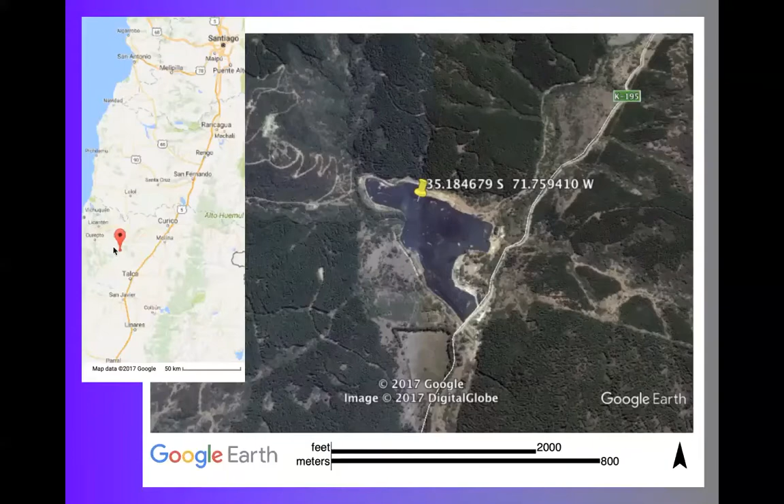The inset map on the left shows the location where this tailings dam failure was. Santiago's up on the upper right, and our location is about 2.5 hours south of Santiago along Route 5 near the town of Talca. This tailings dam was at a defunct gold mine. It had stopped operations, I believe, in '83.

What we could piece together was this was the construction of the tailings dam in four phases. There was an initial phase of ponding with coarse material for the dam, and then there was a downstream dam that was placed and then expanded, and then this was the state it was left in when the gold mine closed down. You can see that there might be issues because this tailings dam is floating on some of the ponded material, and upstream this one's also on the ponded material. As we know, that's a no-no when you're constructing tailings dams.

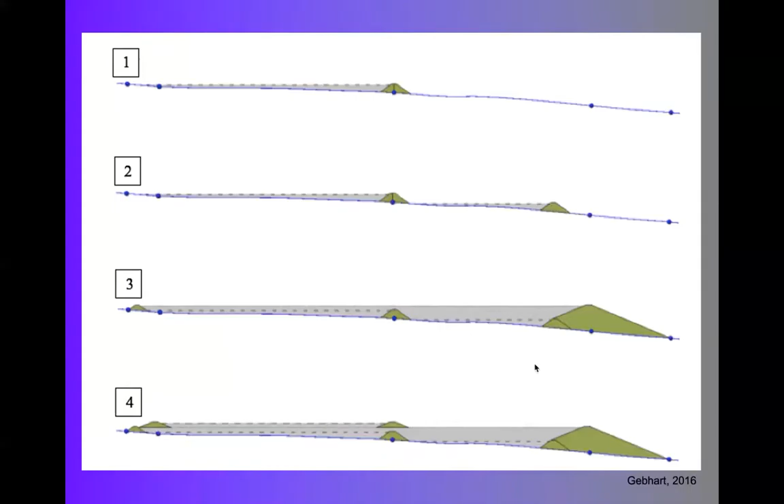So along comes the magnitude 8.8 earthquake. This was, I believe, the 5th largest earthquake in recorded history until the Tohoku event happened, and then it got bumped down to 6th. But this was a major event, and the ground shaking was distributed over a vast area.

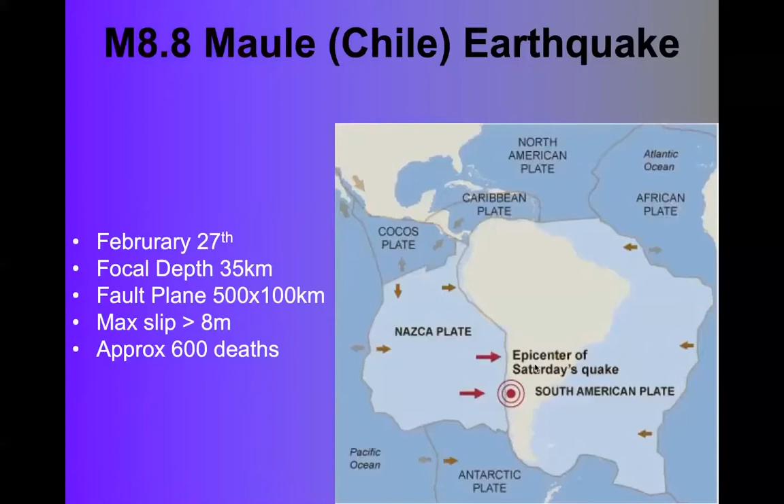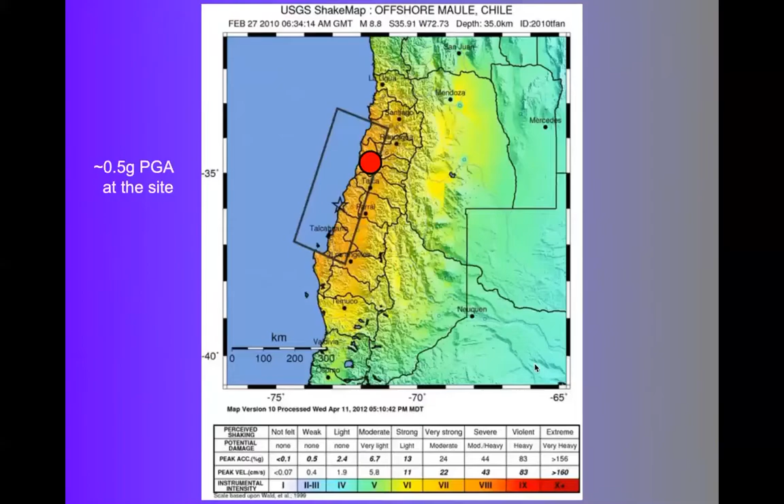So once the Santiago airport was opened, I was part of the first team that was in there. I was on team, I think I was actually before Team A. I was there with Christian Ledezma and Montalva also was there. We started to get the investigations going.

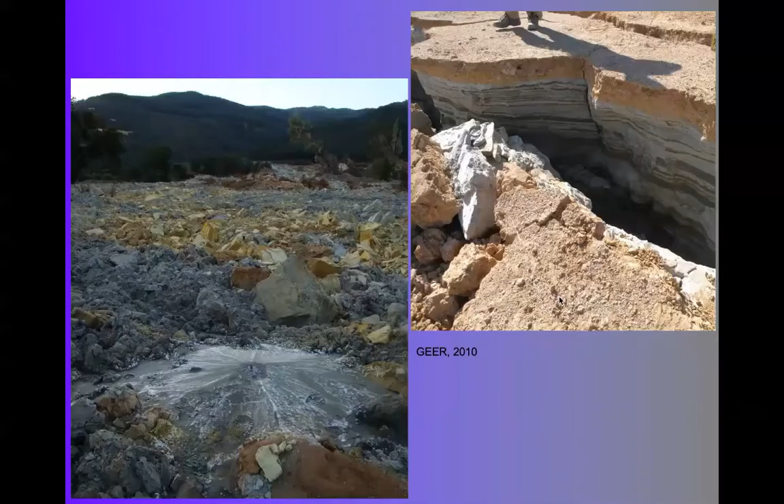I've given this talk a couple times now, and you can imagine the interested parties are mining parties. I've given it in Santiago to academics, mining engineers, and mining company executives. I've also given it in Butte, Montana, where mining is essentially ceased, but there are massive tailings dams looming above the city. So you can imagine when I give it to those audiences, I have their rapt attention.

So I'm going to digress a little bit into the physics. Recently I've been looking at tying debris flows and flow failures together. I live in California and work on liquefaction, and I also work on debris flows and flow failures. So I was interested in the overlap of the physics, and there are some commonalities. We can have liquefaction or debris flows triggered by a number of different mechanisms.

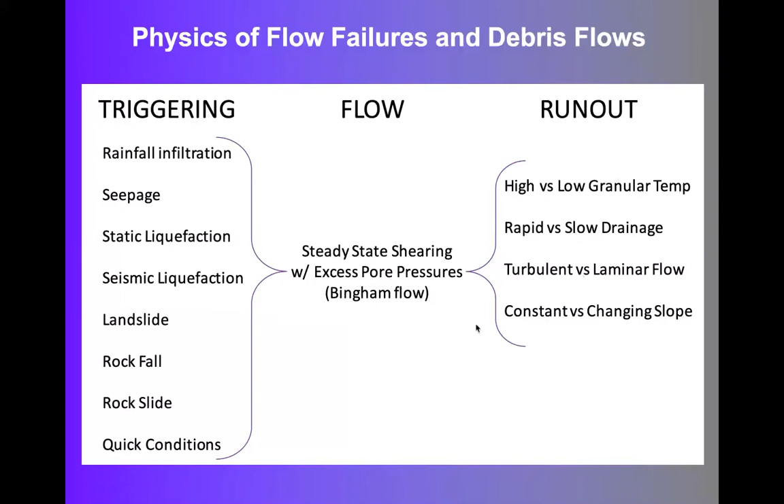With our tailings dam material, generally we're dealing with a contractive material that's going to be above the critical state line, where when it's triggered, or we start stressing it, particularly in a seismic manner, we hit the instability line and then we start to get flow.

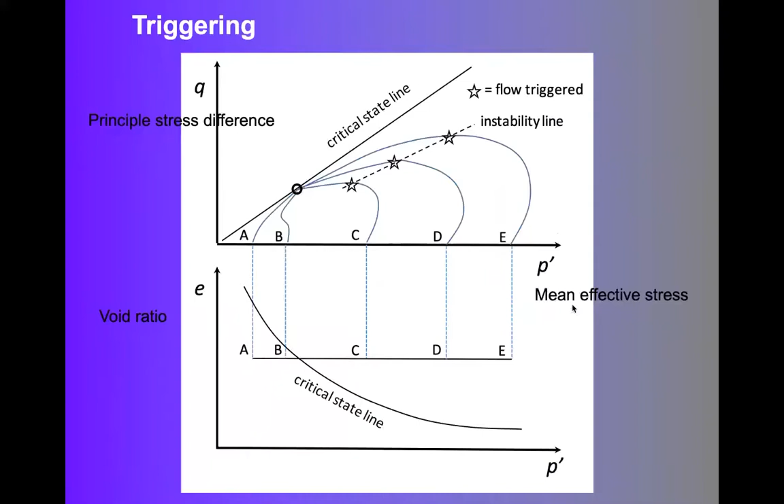And 350 meters, that's a large strain. So we're definitely, for a large portion, in the steady state range, where we've hit critical void ratio, and then we're just at our residual strength of that material.

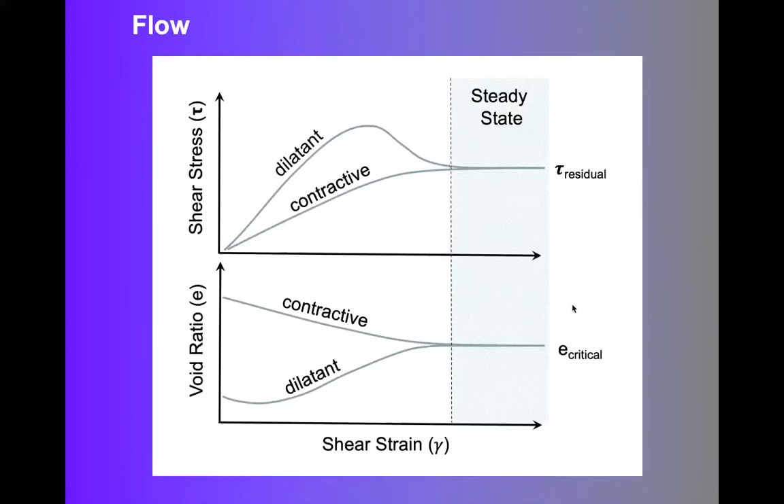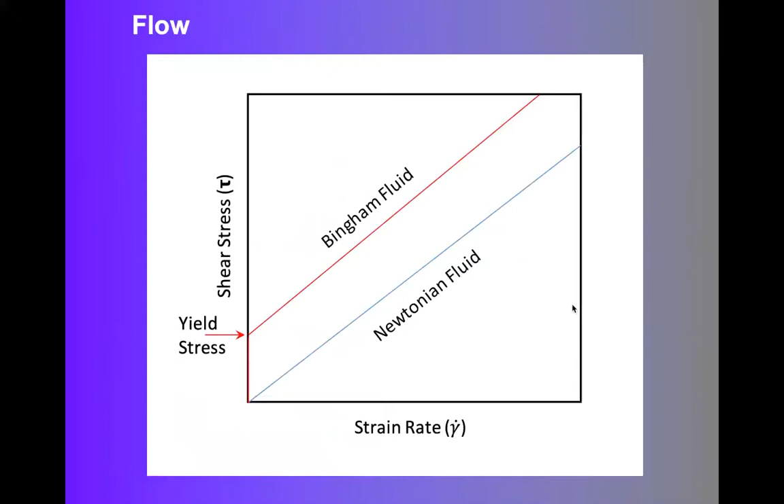Are we maintaining those excess pore pressures, or are they dissipated quickly? With tailings material, we're often talking about the ponded material being non-plastic silts, which have very slow drainage. So they're slow to generate the excess pore pressures, but once they generate them, they're very slow to dissipate as well.

For our material here, I don't imagine there would be any contribution from this granular temperature concept because it's fairly uniformly graded, fine sands and coarse silts. I'm not even going to try to conjecture if we had any turbulence in it. I would guess it was mainly laminar flow that we're dealing with, but it's really hard to make any guess.

The slope was fairly constant for our tailings dam, and there wasn't really a berm at the bottom. It just ran out till it had dissipated itself, thinned out, and released those excess pore pressures.

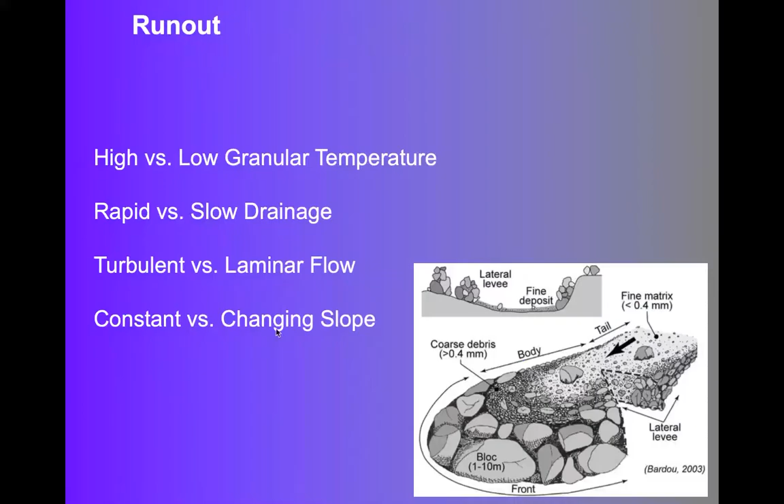Well, the lawsuit that was going on in Chile, the environmental lawsuit, had funded the SPT investigations, and Christian Ledezma at Católica University was running that. I had been down there, and he said, you know what, we went back to Las Palmas, and I said, well, you did?

He said, yeah, we got funding to do 5 SPT, and that really got me going. I said, okay, we're going to mobilize and do some CPT and some shear wave velocity, and we'll have a whole suite of subsurface investigations. I thought this is great, because I've dealt with the flow failure case history database before, and it is meager. Sometimes you'll have a particular case history with just minimal data, and we have to extrapolate a lot in geotechnical engineering. So I thought, this is a great situation where we could maximize the amount of subsurface data on this case history, and really turn it into the gold standard for flow failure investigations. We can't always get all the way there, but that was the goal.

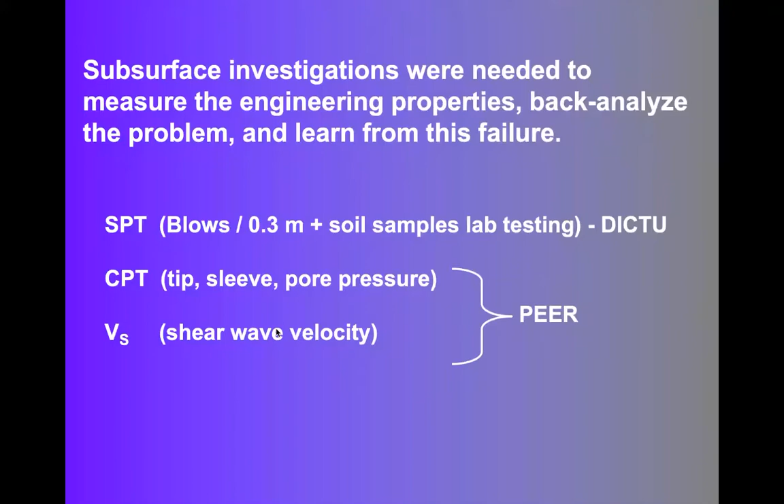Now I'm showing where the SPT investigations were done by Católica University by Christian Ledezma. He was able to fund 5 SPT, all in the intact material, trying to get an idea of what the intact ponded material looked like, and also poke through the dams themselves to see what they looked like. Okay, so then my role is to come and do CPT.

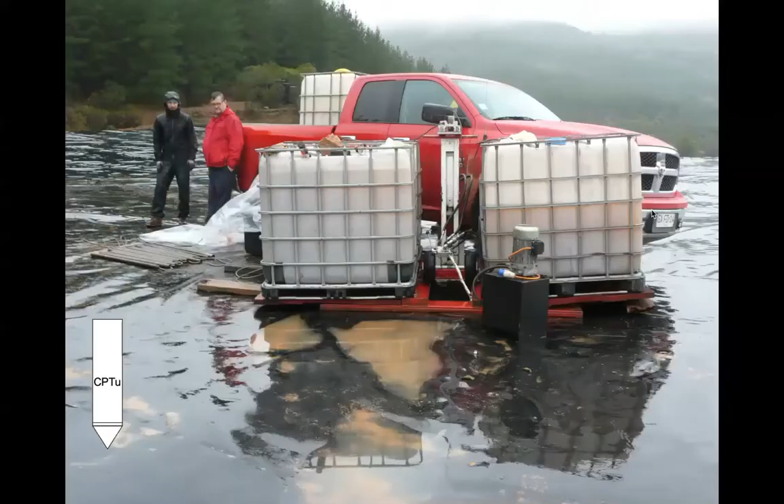So here we are in business. Here's the hydraulic ram, here's the pump. Over here underneath the plastic sheet near Dave Frost is our computer equipment and our data acquisition system. So it looks a little bit janky, but the results we get are just like the results you'd see coming out of a CPT truck.

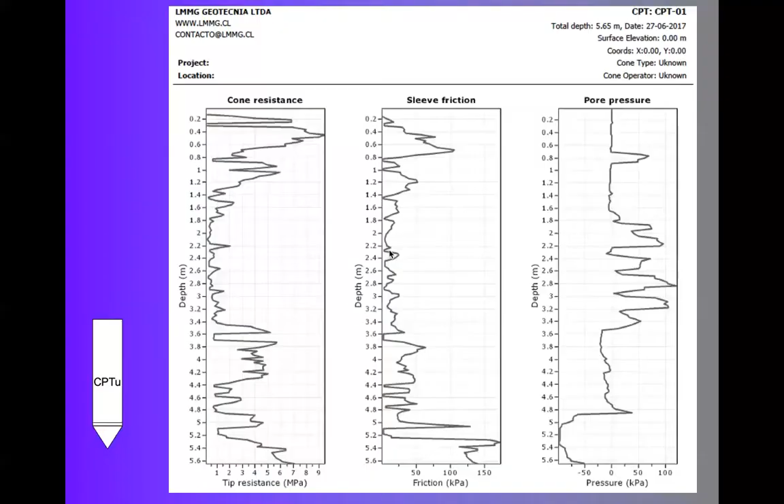So we had good results. The drawback of using portable equipment is the setup and the teardown. Whereas if we had the truck up there, we could have probably done at least 2 CPT a day, maybe more. With the portable equipment, we could only do 1 CPT a day because it would take at least a couple hours to do the setup and a couple hours for the teardown. Pushing the cone only took half an hour. And then with the inclement weather on top of that, it was very difficult field conditions, but we were able to achieve the minimum goal we were after.

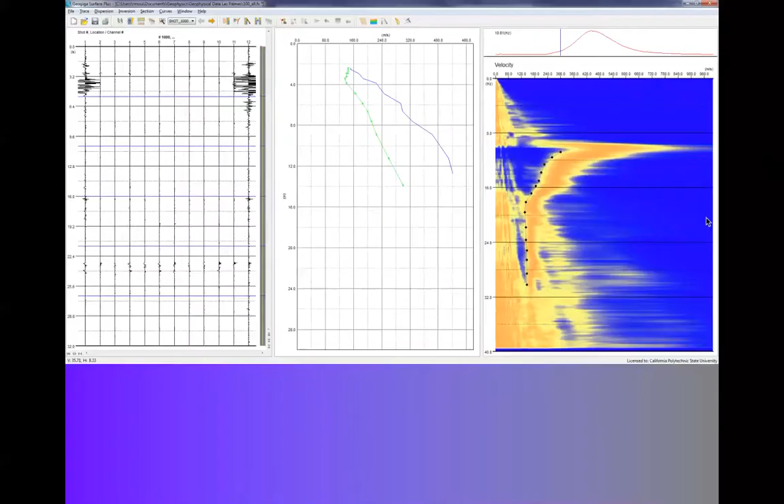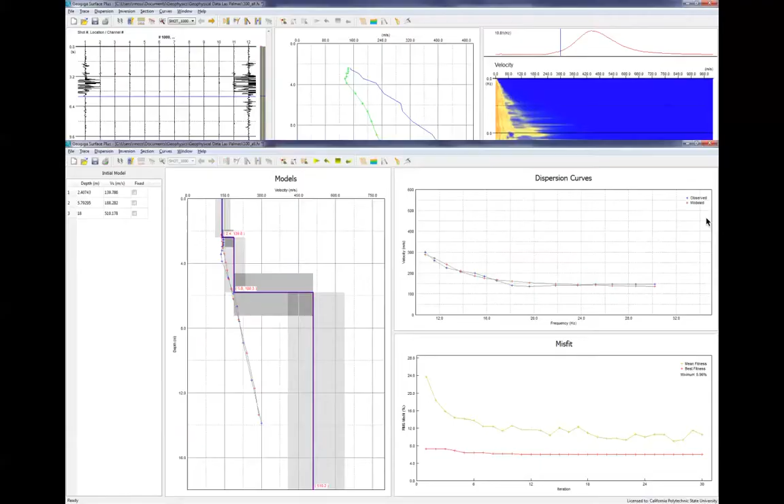So with the passive SPAC analysis, we measure ambient waves, and then we invert a shear wave velocity profile from that. We had pretty good control on the stratigraphy because we did them adjacent to the CPT. So here would be final shear wave velocity profiles that we inverted. For improving accuracy, I'll do different radius SPAC circles and then merge the results.

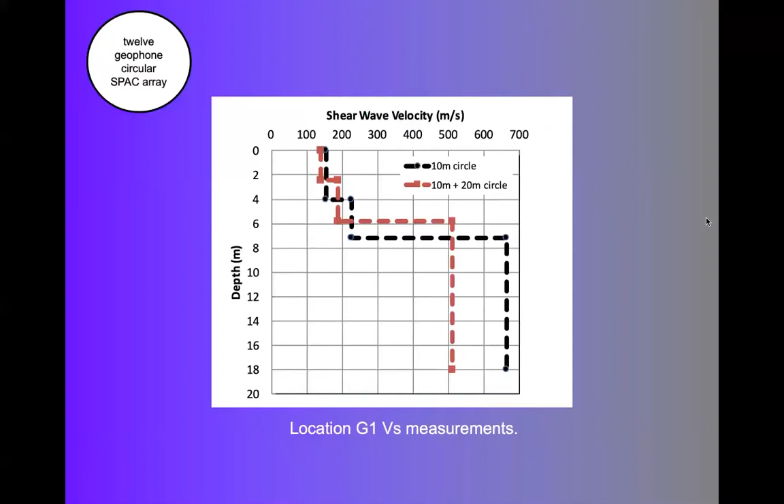We ended up achieving 3 cones, 2 of them co-located with SPT. We were also able to do 5 locations for shear wave velocity. I did some shear wave velocity measurements down in the failed material because there were a couple big blocks of material that had rafted along, and we thought we might be able to image that intact material from those rafted blocks. These were probably rafted blocks of the dam itself that went for a ride.

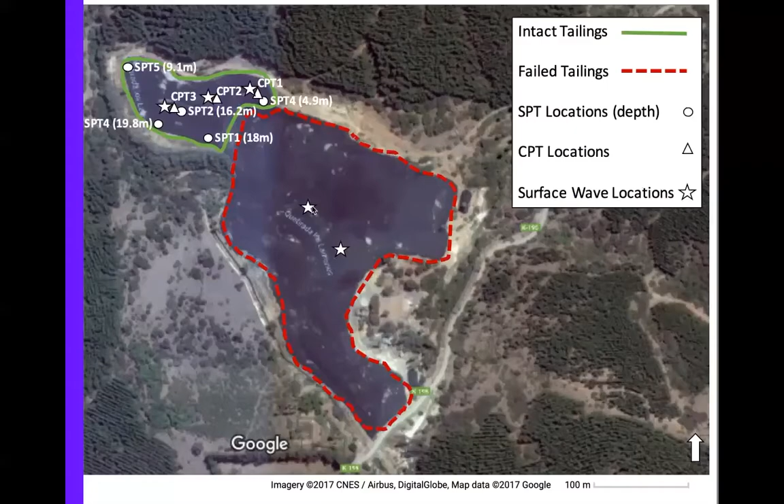So 5 SPT, 3 CPT, and 5 passive shear wave velocity profiles, in addition to the lidar. And from the geophysical investigations, Rob Kayen had done SASW. I say 3 plus 1 because we do intend at some point to go back and push a CPT on one of those back tailings dams, co-located with an SPT. We still intend to do that. We're waiting for a project down in that area, then we'll do a side trip and punch the cone in there.

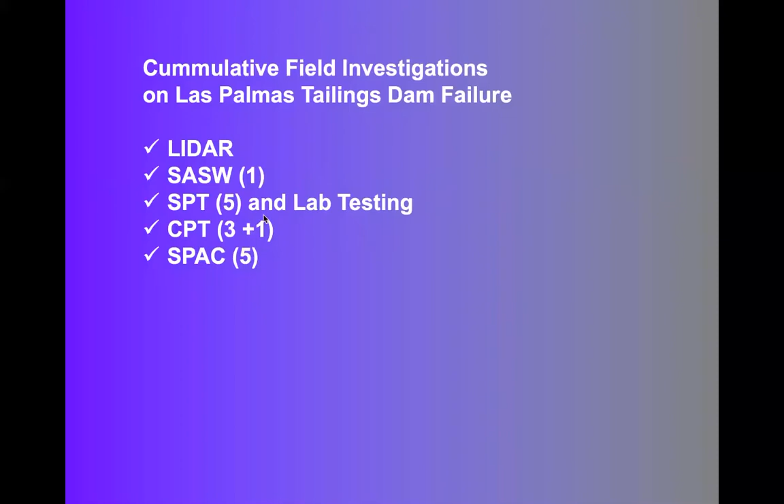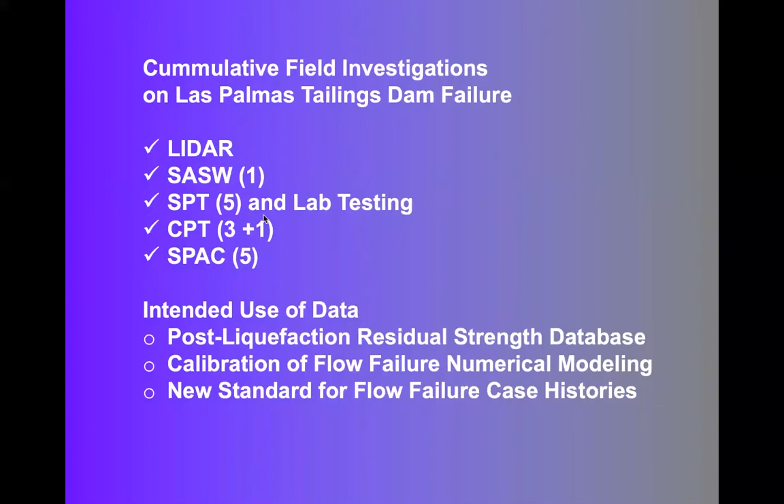So the intended use, as I mentioned, is another point in our post-liquefaction residual strength database. This would be a good case history also for calibrating numerical models. We wanted to try to set a standard for what flow failure case history investigations should look like. The stars really aligned on this - I had concepts about doing this, but then the lawsuit resulting in the SPT gave more impetus to it. Then I started bugging NGL, saying hey, I've got this great thing going on in Chile, we just need a little bit of money to pull off the investigations.

The results - here's a histogram of the SPT results. You can see that in the suspect material, we're looking at clean sand, overburden corrected and energy corrected blow counts on the order of 4 to 5 for the majority of it.

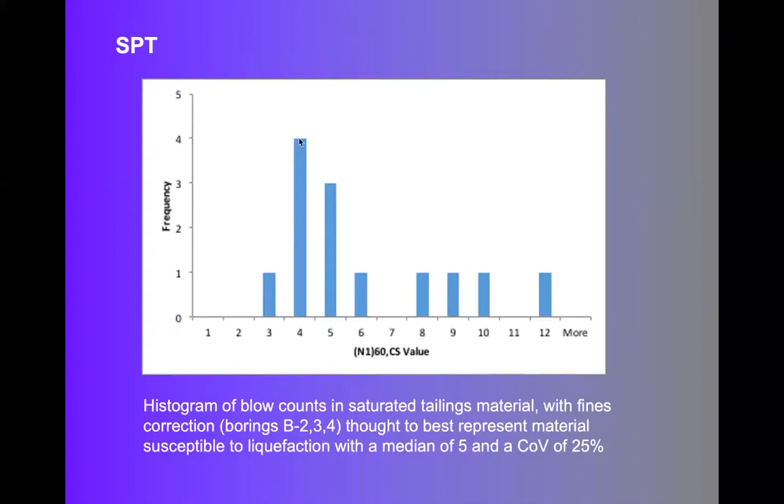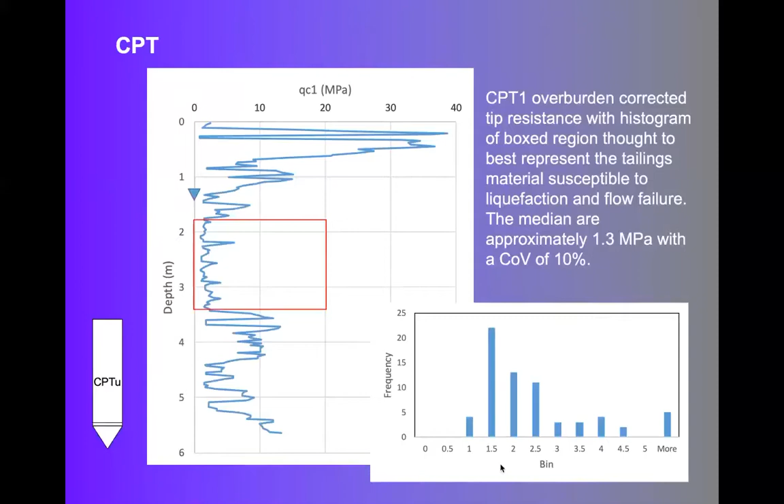CPT results - here's a histogram, and we're looking at, in megapascals, 1.5 to 2 for our overburden corrected tip resistance. And shear wave velocity on the order of 170 to 180 meters per second, all in that same material.

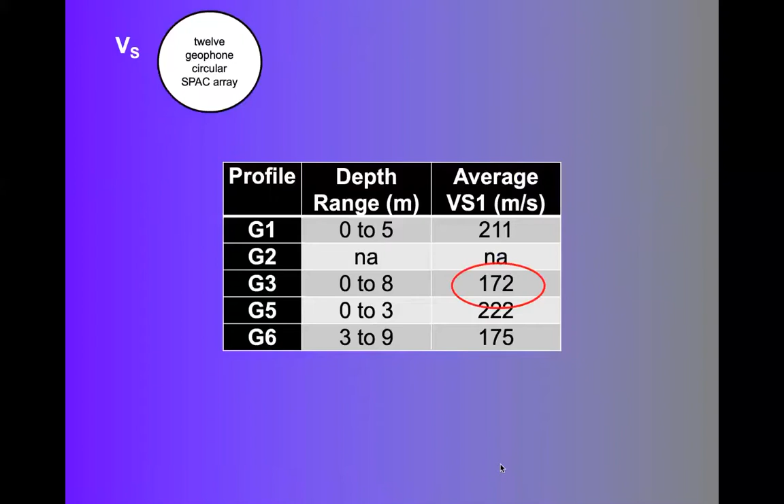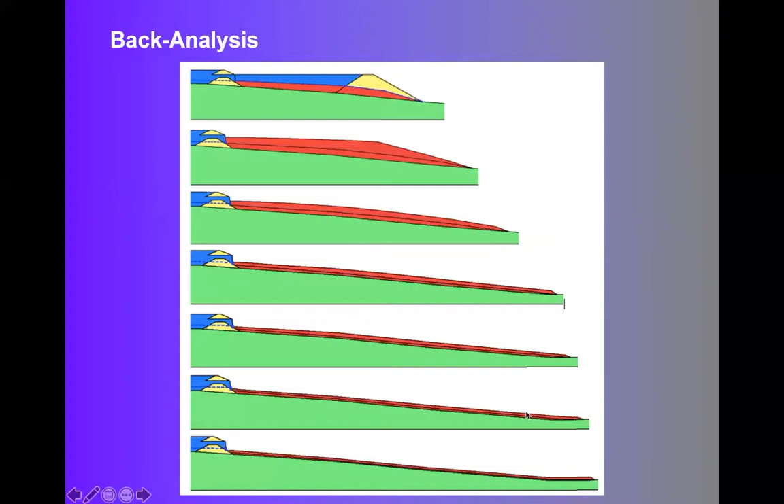Here is our hypothetical progression of intact to completely failed state. We know this intact state right here, and we know this failed state right here, and then we make assumptions as we step through time between them. So again, here's the original geometry and the failed geometry.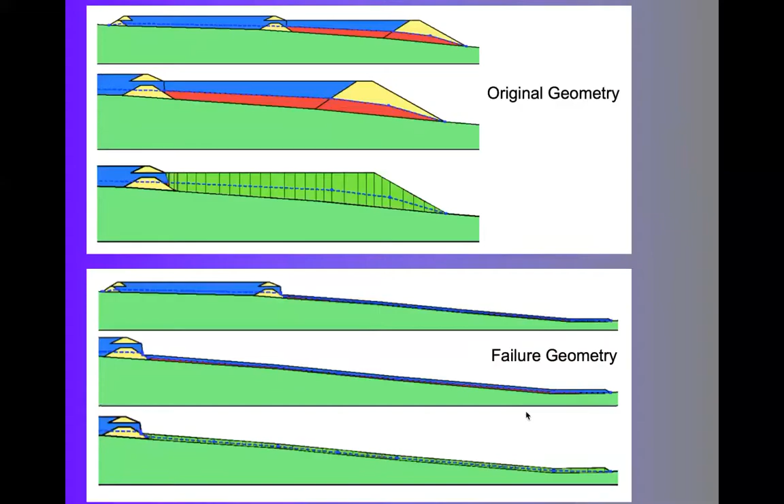To back out the residual strength or liquefied strength, we use the incremental momentum method from Weber et al. I had participated in doing the statistical analysis on that study, so I was familiar with the incremental momentum method. We had Weber join as an advisor on my graduate student's panel, and he essentially trained the grad student Tristan Gebhart on this method, which we utilized to estimate our liquefied strength.

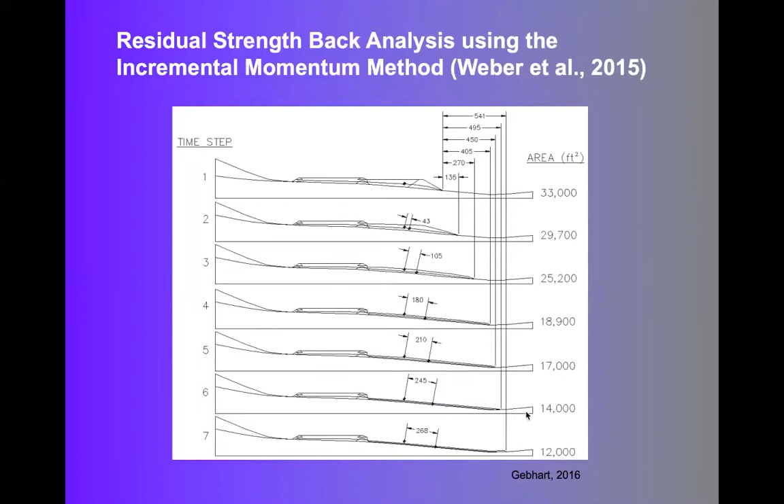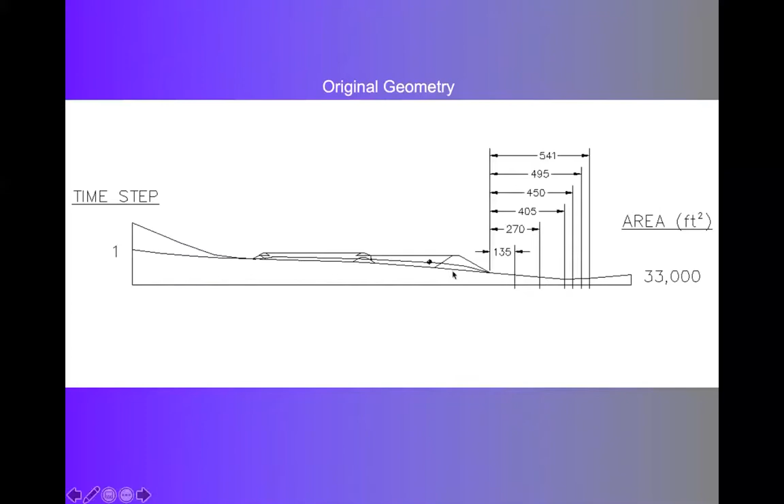So here I've animated it - we're looking at our intact state, and here's the centroid of mass, and we're tracking that centroid of mass through our time steps until our final geometry. I'll show that again because it's kind of fun. Intact... final geometry.

That process is a very tedious and painstaking process. What we're trying to do is balance the geometry and also have it converge at zero velocity after our time steps. Sometimes we need to increase or decrease the number of time steps. Finally, we do this iteration and get that balance, and what pops out is an estimate of the liquefied strength. This is a picture of Tristan's spreadsheet that he used to do the iteration to back out the liquefied strength.

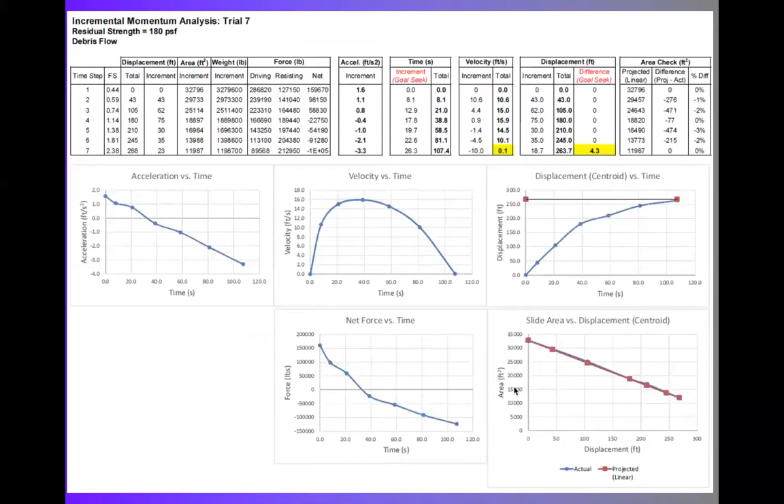And what we end up with after all of that—not quite a decade worth of work—is a data point that plots on our corrected blow count versus liquefied strength plot. Here I'm showing it against the Weber et al. 2015 plot, and it plots out fairly nicely. Not a shocker. We had roughly 2 atmospheres of pressure at the foundation level, blow counts in the 4 to 5 range, and ended up with a liquefied strength in American units of about 180 psf.

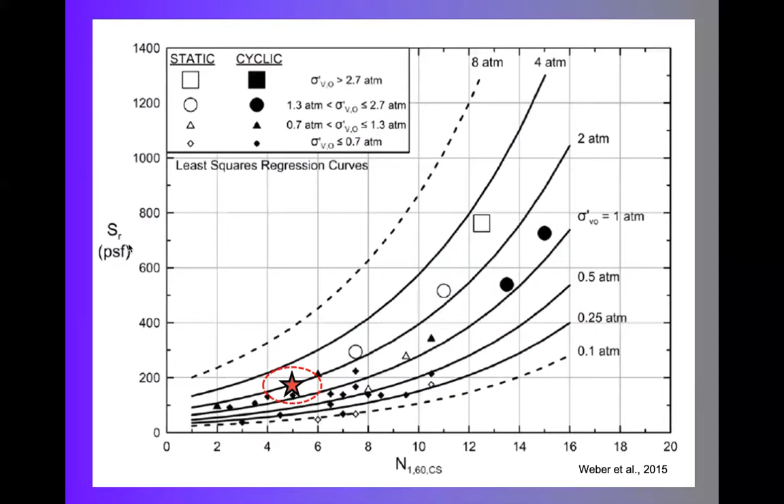So you guys all know this—this is a presentation I've given to engineers and mining executives. Here I'm stepping through our screening analysis for a forward analysis on a tailings dam. We'd want to do investigations—CPT plus SPT if possible, co-located, and also measure shear wave velocity at the same time, definitely measure pore pressures. Get some gradation curves, measure the plasticity on the material, and have a really good handle on the water table.

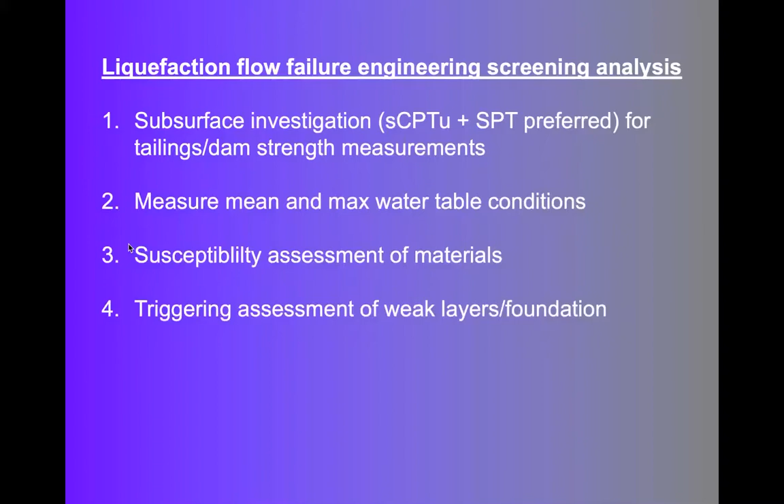We need to do a susceptibility analysis, then triggering on the weakest layers, particularly in the foundation material. Then we do a post-liquefaction pseudostatic stability analysis using some residual or liquefied strength from our various studies. And if we find the factor of safety is less than 1, we want to assess the consequences and/or ramp up the study and estimate some deformations.

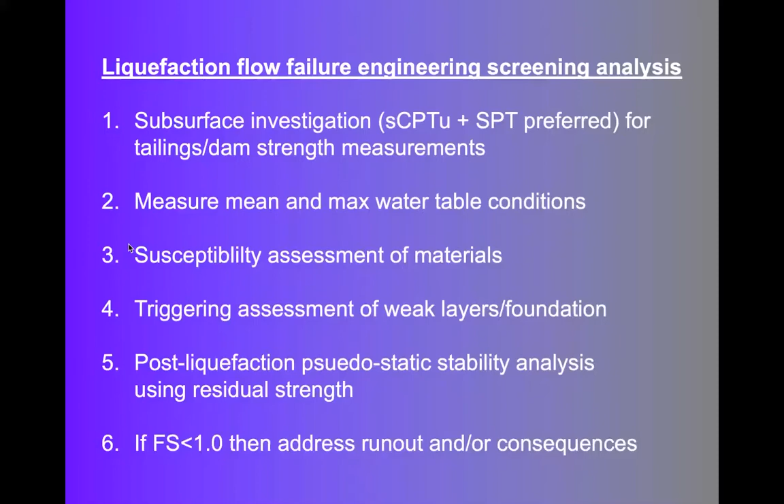So here I'm showing typical susceptibility methods, and the fines are going to control. Also, I know this isn't as common, but you can do susceptibility with CPT—Ic is a very popular factor. Also, from our older study, you can just look at the friction ratio, and if the friction ratio is less than about 5%, it's also in the susceptible range.

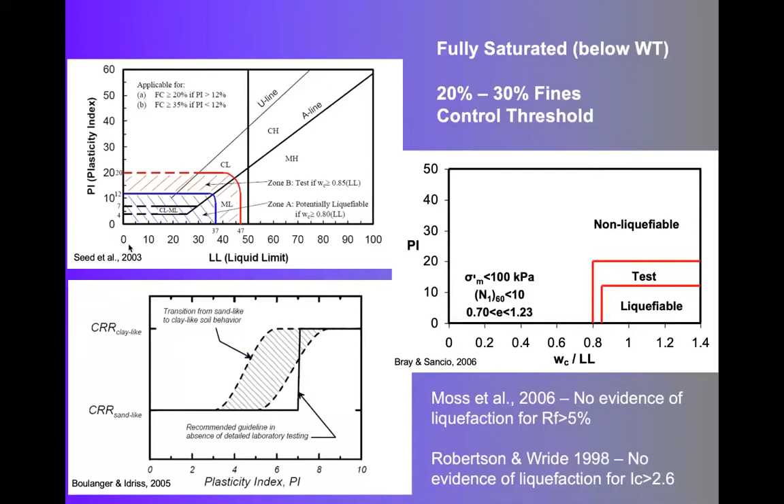Then, is it going to trigger? There are all the arguments about what methods should be used. From a consulting perspective, unless you're doing a performance-based analysis, you can just take a big magic marker, draw through the lines, and say yes or no. For a lot of consulting, particularly for screening analysis of tailings dams, this would be sufficient.

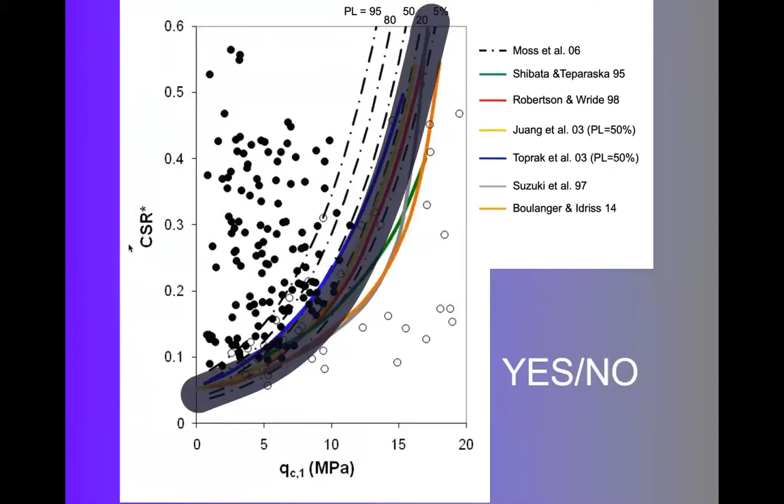This was a subsequent study a colleague and I did, and shown here is a histogram of the Olson and Stark flow failure case histories. Most of the case histories that make up that database—same as the Weber et al. or Steve Kramer's database—it's really about 30 to 32 data points. We can do some statistics on it, and most fall out in this range. So if we've got triggering happening in this low penetration resistance range, and we have the right geometry for it, flow failure would be a particular hazard to investigate.

Also shown here is lateral spreading. Usually we see lateral spreading from about 8 megapascals on down, if we have the right geometry for it.

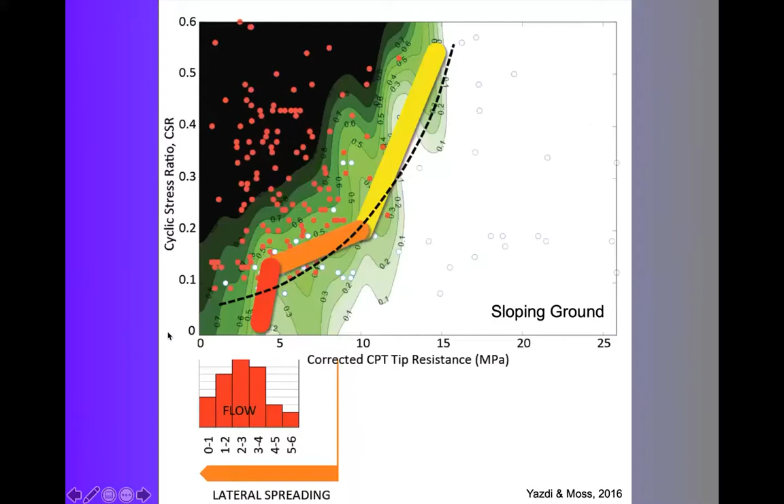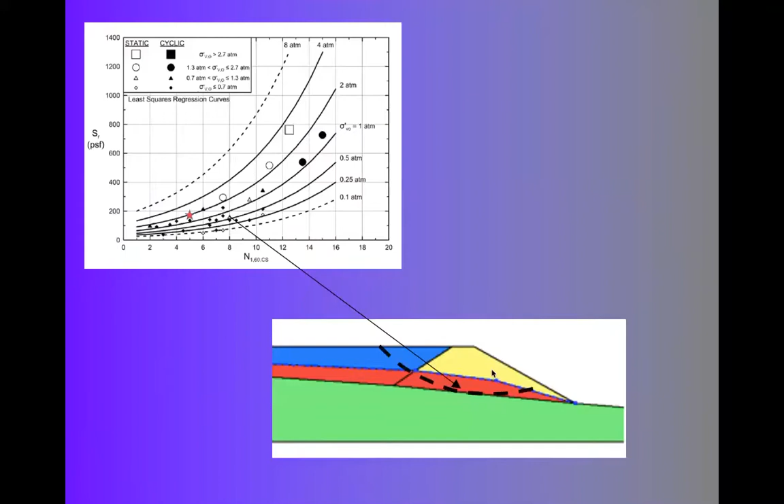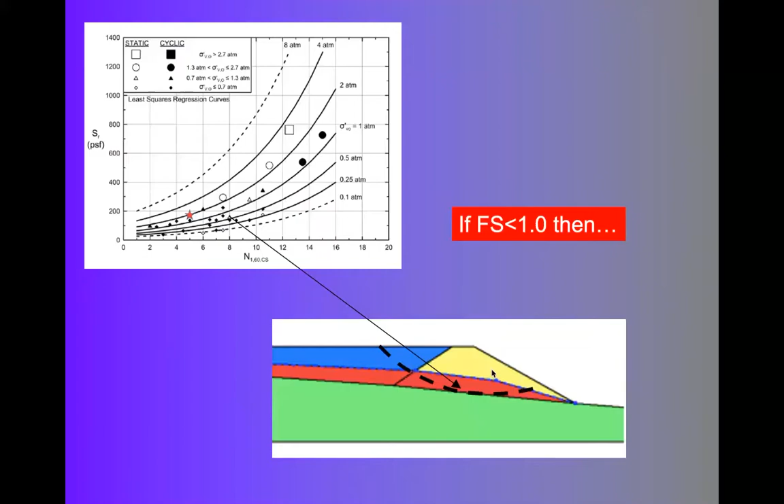So we get some data, run the whole thing, get our liquefied strength, and do some type of pseudostatic limit equilibrium analysis, and we say, yeah, things are bad. Then what? We could go straight to mitigation, which is often very costly. We could do some type of probabilistic analysis, estimating the probability of failure and multiplying it by the consequences, rank that against other risky scenarios, put it into a logic tree, and give that to decision makers. We can also step it up if the client wants, doing finite element or finite difference analysis—there's been some success with discrete element.

I'm a big fan of where the material point method is going, so I threw in this—not mine, just a really nice animation showing rainfall-induced flow and landsliding. I've fiddled with material point method a little bit, and I tell you, it's a pain to build even the simplest models, but I think being able to capture realistic deformations might be worth it.

And so I have hopes that this is going to be used more and more in research and consulting.

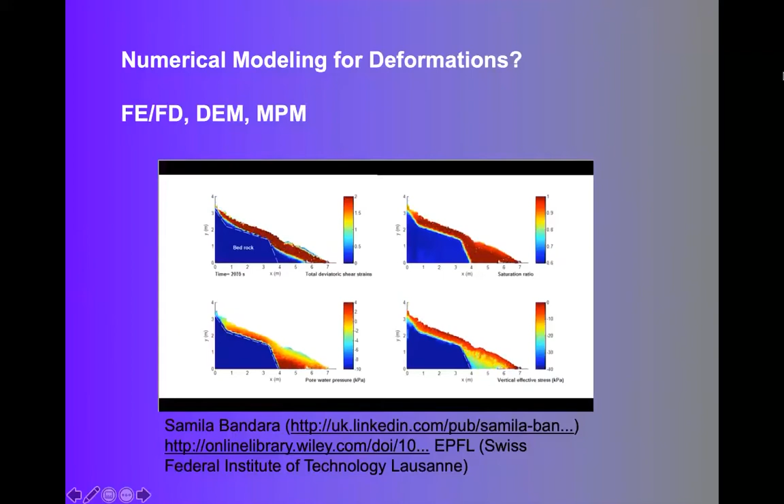So it was a sabbatical I had a couple years ago, and I dedicated a whole week to material point method. I had been communicating with Kenichi Soga up at Berkeley, and he said, oh this is great, and he sent me instructions on how to do it. You got this program to set up the file, a program to compile it, then you run it with the code, and the code's kind of grumpy, you got to tweak it. I spent a whole solid week at my table, the kids were out of town so I had dedicated effort on this, and by the end of the week I achieved a box of sand where you pull the sluice out and the sand flowed through the box - that was dry sand. I was like, that was awesome, but it took me an entire week to do it.

So I was wondering if there was a simpler way to estimate deformations for a flow failure type situation. Having dug through the literature before, I pulled up this dam break solution from Hungr, which you guys have probably seen before - it's a very simple physics-based derivation. And I said, well, how can I prove this up? I haven't published this yet, it's just sitting in that pile of things that need to be published.

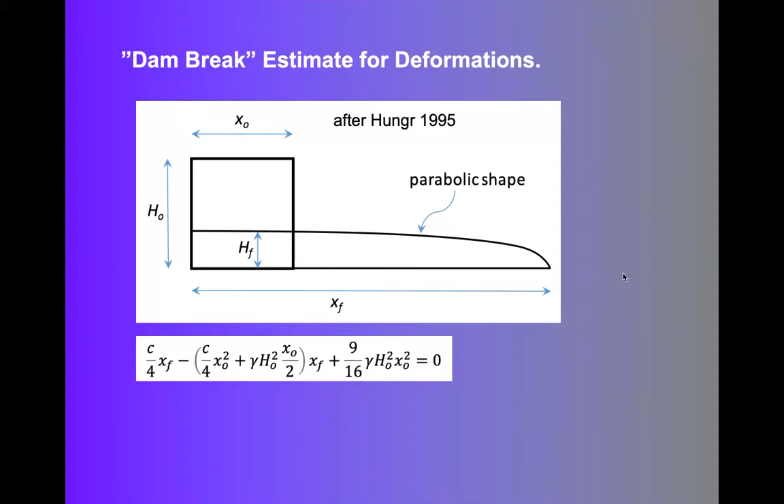What I did is I took the database from Weber et al., roughly 30 cases, and only a subset of those actually have runout measurements. There were two outliers - one was the Fort Peck Dam, which had really high stress conditions, so I limited the stress conditions to 1.5 atmospheres. The other was the Uetsu railroad embankment, also a funny outlier, and I made some viscosity adjustments on that one. With that, I get a fairly good one-to-one relationship. Not shown here is the Las Palmas dam failure, because here I'm doing 50-meter runout and that data point was way out at 350 meters, but it lines up right on this. So that was just a little exploratory work, and I think I'm going to kick this out in a paper in Chile, because I think they'd be very interested in this. But like I said, I haven't published that yet.

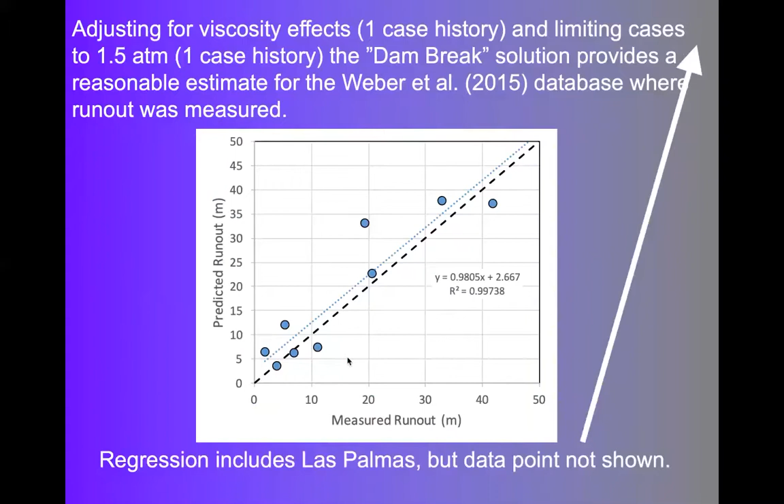So with that, I want to thank all the players involved here: my grad student Tristan Gebhart, my colleague Christian Ledezma down at Catholica, Dave Frost who was a cheerleader for this whole thing, Joe Weber who was on Tristan's advisory panel, and John Stewart who helped shepherd the PEER report to the end and put a lot of time into that. I also want to thank the funding from NRC and through SWRI, and the GEER investigations which kicked this all off through NSF, and also Caltrans funding through PEER. The only place we've published this in its entirety is the PEER report we finally kicked out in 2019.

And that's it, so hopefully you found it an enjoyable story. I know it was good - these arcs of research are very fun to see. Speaking of arcs of research, we're doing a follow-up study right now on the Mataquito Bridge liquefaction and lateral spreading that happened in the 2010 earthquake, which should come out in the next year or two as well. So even though the earthquake was over a decade ago, it's still producing useful research and fun projects to work on.